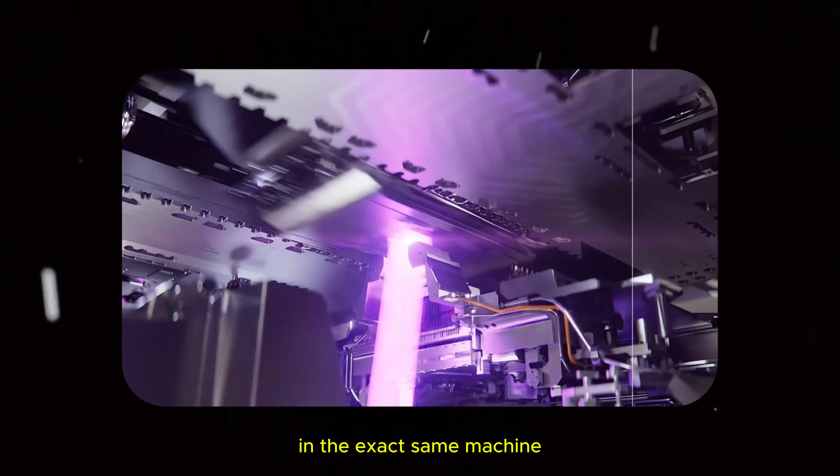50,000 times every single second, a laser detonates a droplet of molten tin, smaller than a grain of pollen. In the exact same machine, a separate mechanical stage slings a silicon wafer back and forth at 32 Gs, more than 3 times the force that makes a fighter pilot black out.

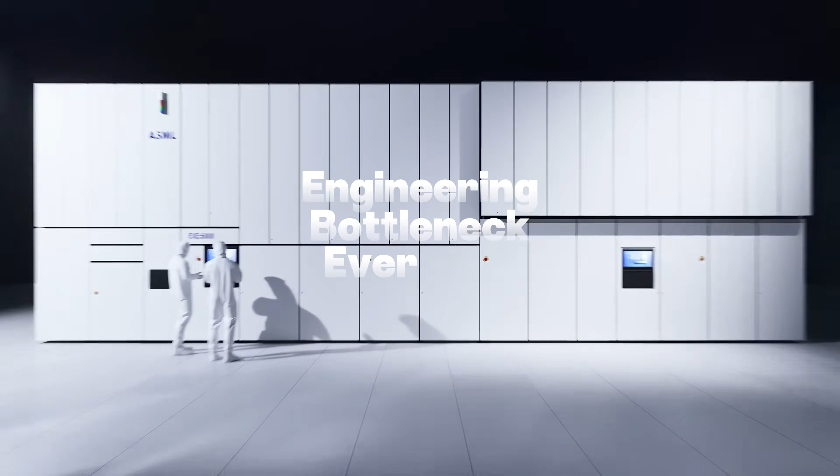It has to land within a fraction of a nanometer every single time. Which is exactly why the United States government stepped in and legally prohibited this machine from ever entering China. It is not classified as a weapon, it is a leash, and if this single engineering bottleneck ever fails, the global balance of power changes forever.

In February 2023, ASML quietly admitted something buried inside a routine annual report, the kind of document nobody reads except corporate lawyers and compliance officers. A former employee, based in China, had pulled out confidential data from a system called Teamcenter. This isn't just an app, it's the internal digital vault where ASML stores the highly classified technical guts of how its machines are actually built.

It wasn't a blueprint stolen off a desk. It was a repository login containing 2 million lines of source code from a related case ASML had already fought in court. The company called it not material. The Dutch government called it economic espionage.

We are going to come back to this login screen because it's not just a footnote, it is the entire point. A single company spent 40 years building a physical machine monopoly that literally no other company on earth can replicate it. And the most dangerous threat to that laboratory wasn't another lab or another research tech or anything. It was a login and a password.

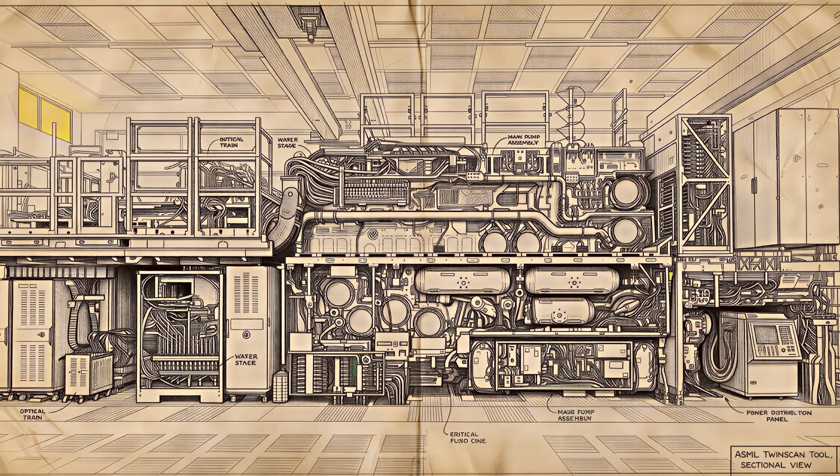To understand why that login is treated as NASA-level security itself, we have to look inside the vault itself. What was it inside that made the login and password so critical? Once you see what this machine forces physics to do, you will understand why a single leaked credential is treated like a declaration of war.

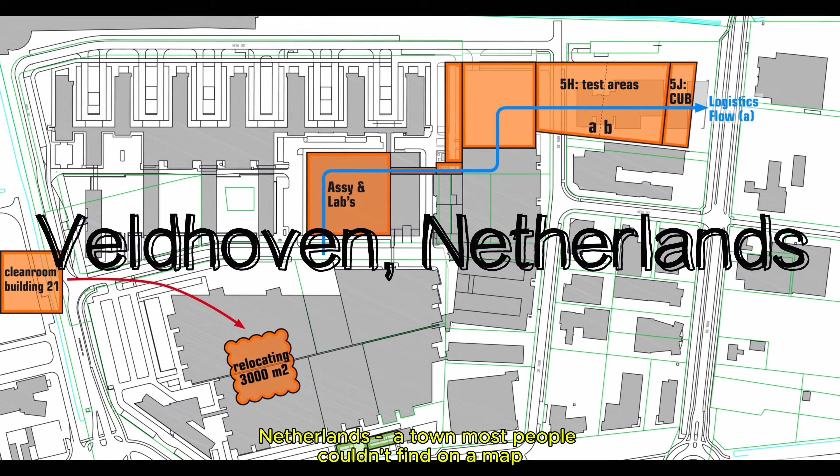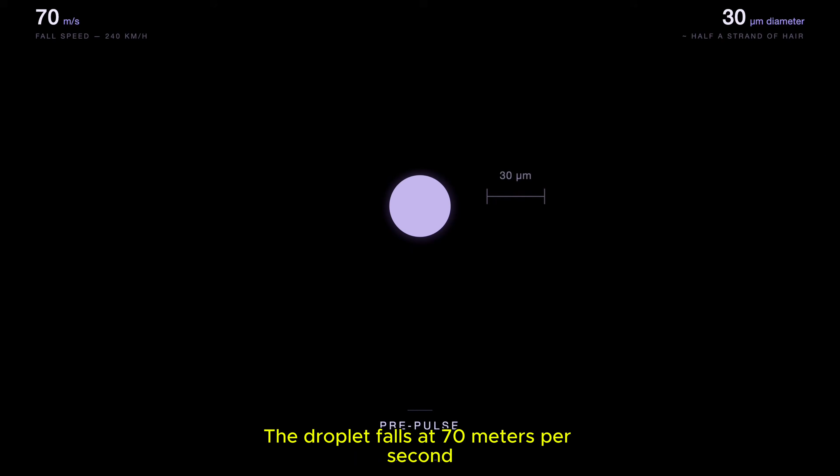A nozzle inside a sealed vacuum chamber, located in a quiet industrial park in Veldhoven, Netherlands, a town most people couldn't find on a map. It fires a continuous stream of molten tin. Each individual droplet is exactly 30 microns wide. For scale, that is roughly a quarter of the width of a single human hair. You could fit 4 of these droplets side by side, like on the same strand of hair, and still have some room left over. The droplet falls at 70 meters per second, 240 kilometers an hour. That is faster than a Formula 1 car at full throttle.

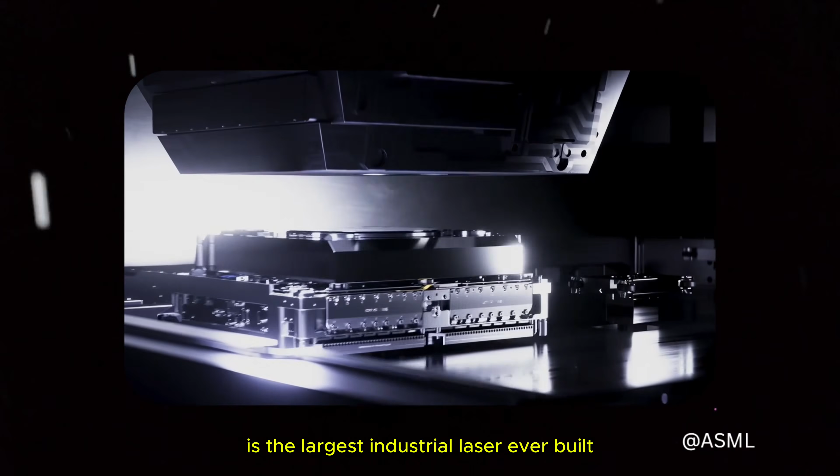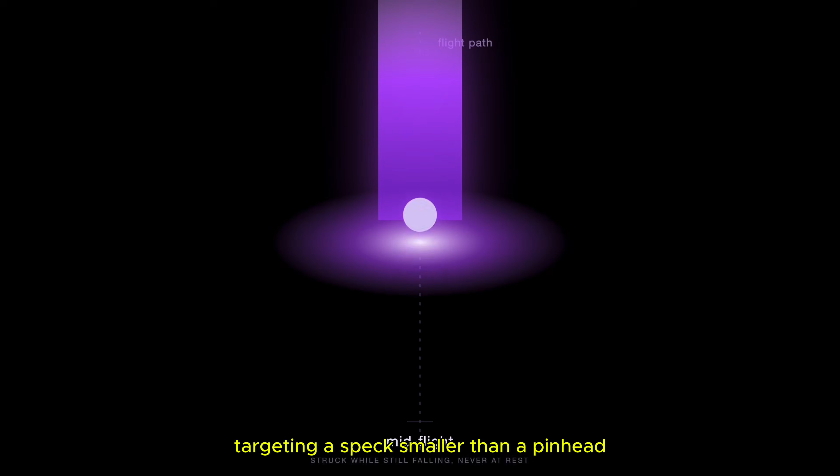Waiting for it in the dark is the largest industrial laser ever built for a single purpose. It doesn't just fire once, it strikes twice, in sequence, mid-flight, targeting a speck smaller than a pinhead moving at highway speeds. The first pulse is almost gentle, like a pre-pulse. Its only job is to flatten the falling sphere into a paper-thin disc, like punching a water balloon just hard enough to flatten it without bursting it. The timing must be down to the microsecond because this flattened disc is about to become the real target.

Then, a fraction of a microsecond later, the second pulse hits at full power. The tin doesn't melt, it vanishes into plasma, 240,000 degrees Celsius. That is 40 times hotter than the surface of the sun. A literal star, recreated for literally a microsecond that you wouldn't even notice, and you could walk past it even in a parking lot.

When that former employee breached the Teamcenter vault, they weren't just looking at schematics. They were looking at the code required to govern this exact sequence: droplet, pre-pulse, kill shot, plasma, 50,000 times every single second, running continuously in Taiwan, South Korea, and Arizona right now. Nobody designed this process to be safe. They designed it to be barely survivable for the machine itself, so the machine could even break at any point. Because what that plasma explosion unleashes next is an engineering disaster ASML still hasn't fully solved.

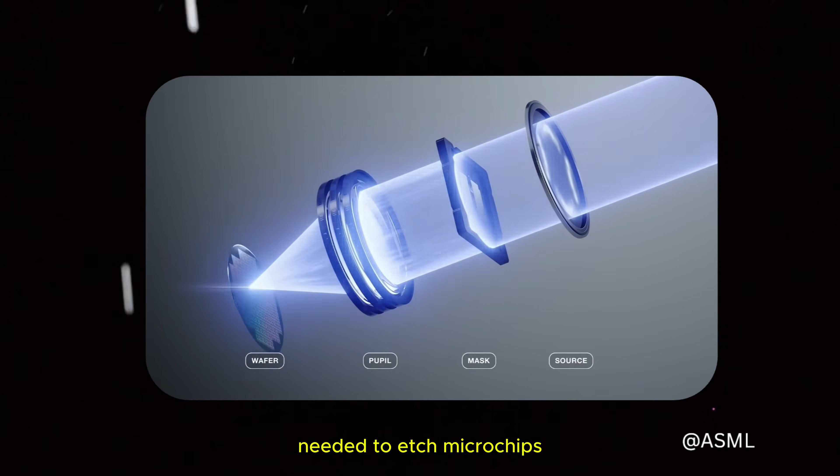That plasma blast doesn't just generate the extreme ultraviolet light needed to etch microchips, it creates shrapnel. Every single detonation throws high-energy tin ions and molten debris straight into the only surface forced to take the hit: the collector mirror, 50,000 times per second. This multi-million-dollar optical surface is sandblasted by material hot enough to vaporize steel. By any normal engineering logic, this should not even last a single operational shift. But here's why it does.

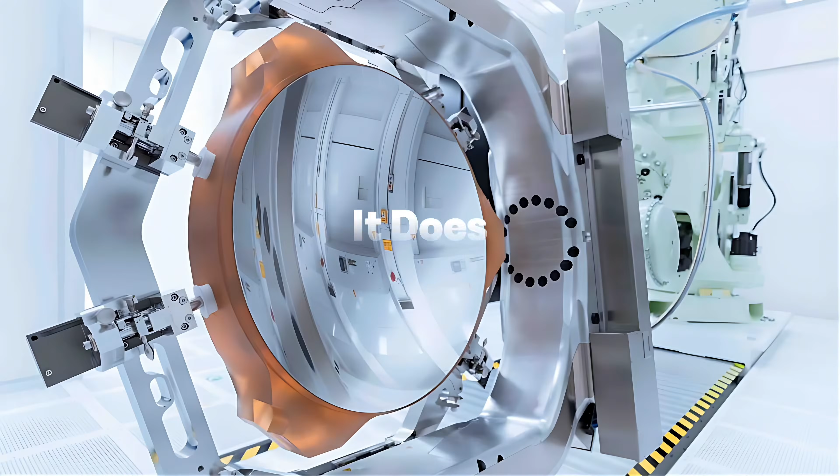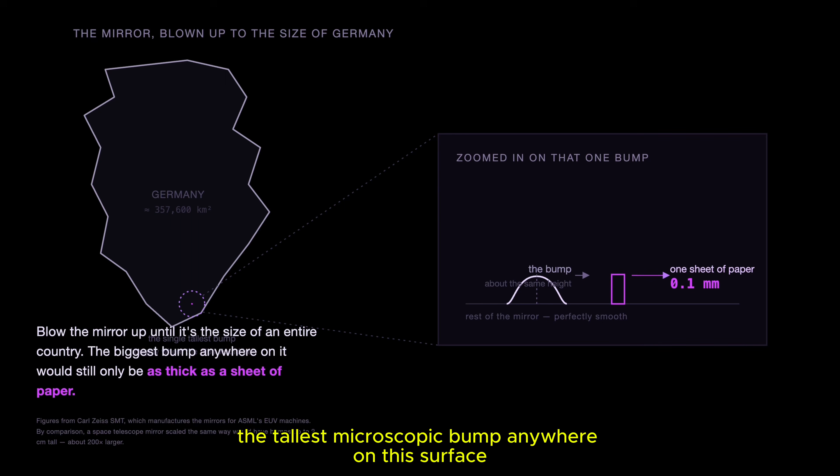This mirror, built by Carl Zeiss SMT in Germany, is the most precisely manufactured surface human beings have ever engineered. If you scale this single mirror up to the physical size of the entire country of Germany, the tallest microscopic bump anywhere on this surface would be a mere 1/10 of a millimeter, thinner than a single sheet of paper.

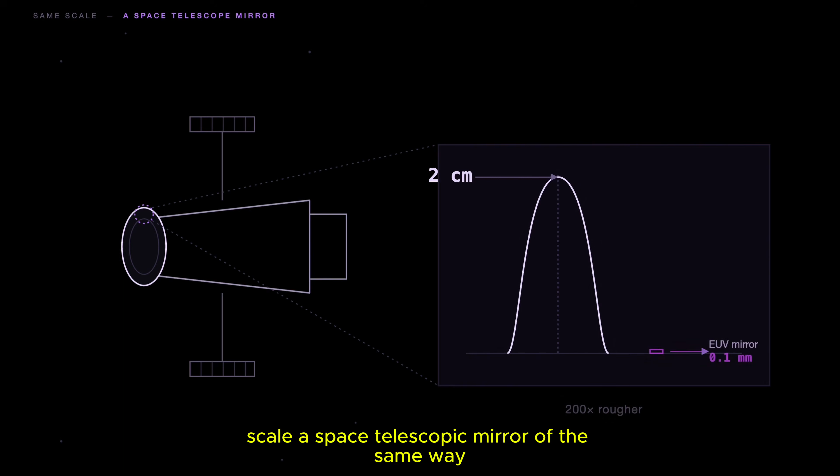Scale a space telescopic mirror up the same way, and its imperfections would stand 2 centimeters tall. This collector is 200 times flatter than the glass we use to photograph deep space galaxies. 200 times, and yet the atomic violence still wins.

A contamination layer, even if it's just 1 nanometer thick, a film thinner than the wall of a soap bubble, slashes the mirror's optical performance by 20%. It takes exactly 60 seconds for that degradation to happen. Think about that. A masterpiece of atomic scale polishing ruined by dirt you cannot even see, in the time it takes for you to watch this section of the video.

So how do you keep a mirror from dying every 60 seconds? How do you protect it? ASML's solution is absurdly bold: they flood the entire vacuum chamber with hydrogen gas. The hydrogen chemically reacts with the rogue contamination, scrubbing it off the mirror automatically while the machine continues to fire. It sounds simple, or maybe it doesn't, but it works perfectly, and it has been working perfectly for years. That's how they have been able to keep the machine from destroying itself. If that wasn't the case, it would die every minute. This machine is just insanely vulnerable to that kind of thing.

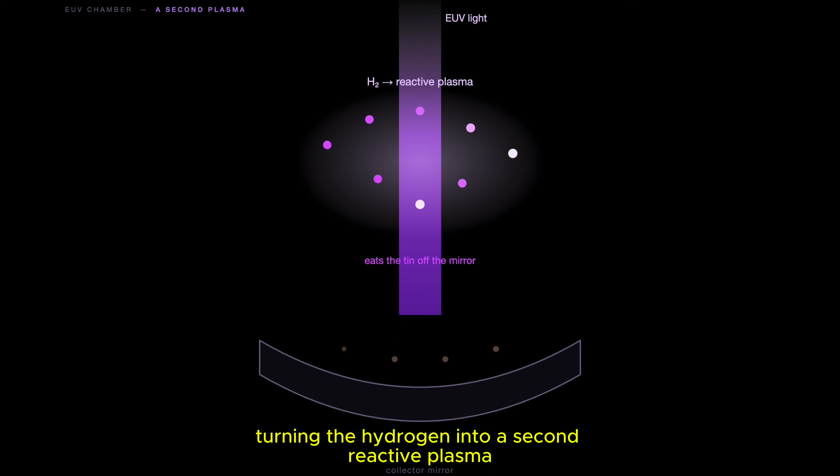But there is a catch. That same hydrogen gas is blasted by the ultra-powered EUV light it's meant to protect. The light ionizes the gas, turning the hydrogen into a second reactive plasma, one that can blister the mirror coating from underneath and introduce something every engineer inside that facility is trained to fear: the permanent standing risk of a hydrogen explosion inside a sealed chamber.

And all that plasma chaos we just walked through is just the top layer of it. The bottom half of the machine actually has to use that light now. Underneath the optical path rests the mechanical stage holding the silicon wafer, waiting for its exposure. In ASML's newest high-NA systems, this stage doesn't glide, it violently slams. It accelerates and decelerates from 0 to 100 km/h in a tenth of a second inside a hard vacuum, pulling 32 Gs of force. Fighter pilots train for years to survive 9 Gs before blacking out.

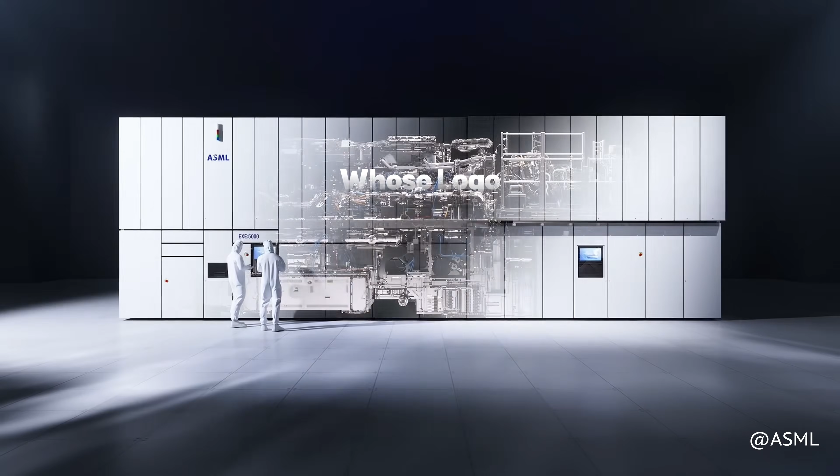Here's the part that nobody mostly tells you about this: ASML doesn't really build most of this. They don't have the bigger hand here. The company, whose logo is stamped on the outside of this 180-ton chassis, manufactures somewhere between 10 to 20% of the components inside. The other 80 to 90% comes from the outside. It is sourced from over 5,100 highly specialized suppliers scattered across a dozen international borders. And crucially, almost every single one of these companies is the only entity that can actually build their part themselves.

So this machine is complicated, to say the least, and ASML is not a traditional manufacturer. This is exactly the physical integration point where all of these companies have to be friends, or shake hands together. Which means the real geopolitical question was never how does ASML build this thing? There is nothing - they can't really build this on their own. It's what happens when even one of those companies says, I don't want to deliver this, or I want to stop doing this. What happens to the global economy when even one of 5,100 suppliers stops doing this?

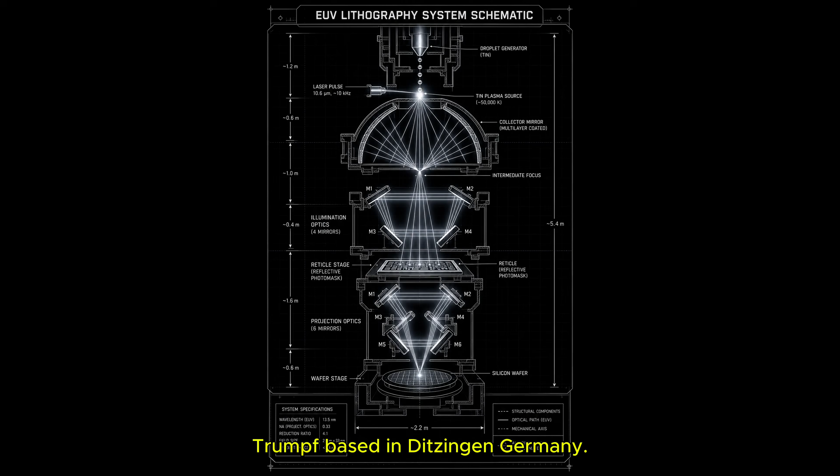We already met Carl Zeiss SMT in Germany the sole source for the ultra-precise mirrors. Now meet the second critical monopoly, Trumpf, based in Ditzingen, Germany. They built a 10-ton carbon dioxide laser used to detonate the tin droplets. This single laser module is made of 450,000 individual parts. For perspective, a commercial Boeing 737 passenger jet has roughly 360,000 parts. The laser system required to ignite a speck of tin smaller than a pollen grain has significantly more components than a commercial airliner.

And the third vital piece doesn't even come from Europe at all. It comes from Cymer, located in San Diego, California - an American firm that ASML was forced to buy for $2.5 billion because absolutely no one else on Earth was able to figure out how to perfectly synchronize 50,000 droplet explosions a second with commercial manufacturing consistency. Three proprietary technologies, three distinct nations - none of them can actually build the machine by themselves.

And yet everyone has to be on the perfection side of things. They have to hit every single thing with perfection in order for this machine to even run. If not, the whole company in Veldhoven freezes. There's really no point to that 180-ton chassis if even one of the parts isn't running.

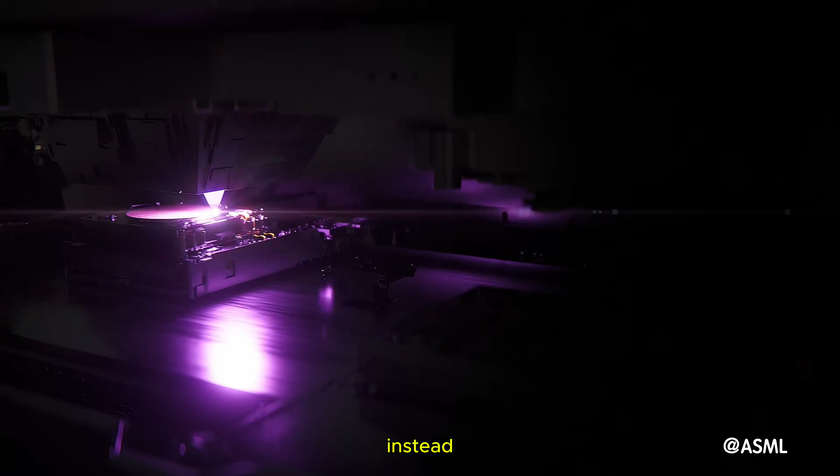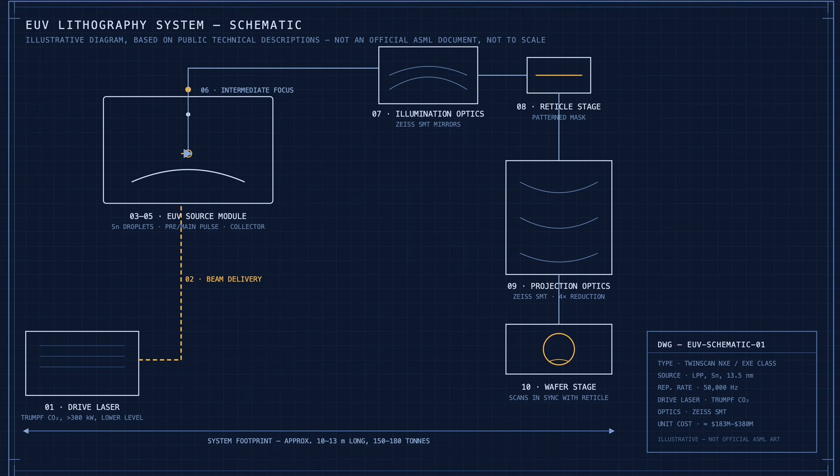But there is one thing - one hidden choke point that should make you worry far more than any hardware system does. Because it isn't mechanical, it's chemical, and outside the semiconductor industry, nobody really talks about it. The extreme ultraviolet light does not carve the silicon directly. Instead, the wafer must first be coated in a highly specialized light-sensitive liquid chemical called photoresist. When the light strikes this film, it alters its chemical solubility, allowing the foundry to etch the circuit lines. Without this specific chemistry, the most expensive machine on Earth is entirely useless.

It becomes nothing more than a $350 million flashlight. That is an expensive flashlight if you ask me. At the leading edge of physics, for the exact chemical formula qualified to handle EUV wavelengths, there are effectively only 3 companies left on Earth: Tokyo Ohka Kogyo, JSR, and Shin-Etsu Chemical. All 3 are Japanese, and together they control over 90% of the total EUV resist market. 90%. Three companies and one island nation.

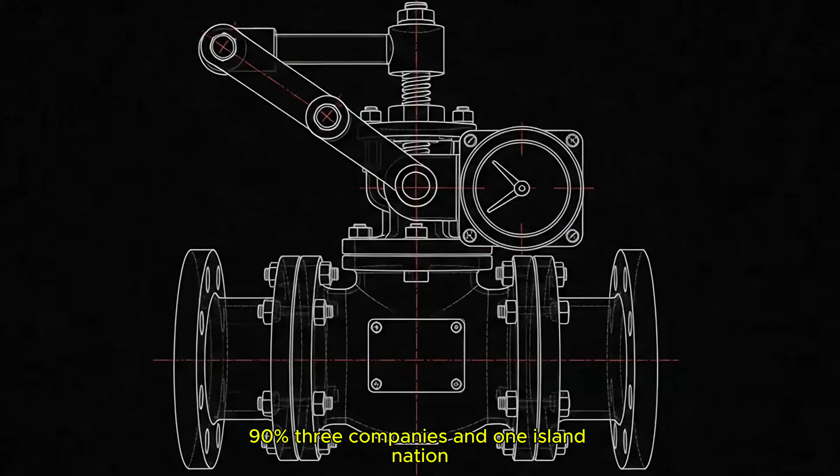And unlike a mechanical valve, you cannot just swap chemical vendors if a supply line experiences a hiccup. Qualifying a brand new photoresist at an advanced fab requires upwards of 12 months of grueling, highly collaborative engineering to get the chemistry, the scanner, and the atomic node to align perfectly. It isn't just a simple purchase order, like whoever places the order gets it right and done. It's not as simple as that, let me just put that outright. And whoever controls those 3 chemical plants holds a countdown timer that a rival nation cannot fast forward, no matter how many billions you throw at it.

This isn't a hypothetical economic theory. This exact weapon has already been fired once and hit a country nobody expected. In July 2019, during a bitter diplomatic dispute, Japan suddenly restricted the export of advanced photoresist and two other foundational chip-making chemicals to South Korea.

Not China, South Korea, the home of Samsung and literal backbone of the global tech economy. For months, the most vital electronic supply chain on Earth watched its production inventory tick down to single digits because a chemical shipment was held at a customs dock. Imagine elite engineers watching their remaining chemical inventory dry up day by day, knowing it takes nearly a year to qualify an alternative formula. That isn't a standard supply chain delay. That is an economic hostage situation.

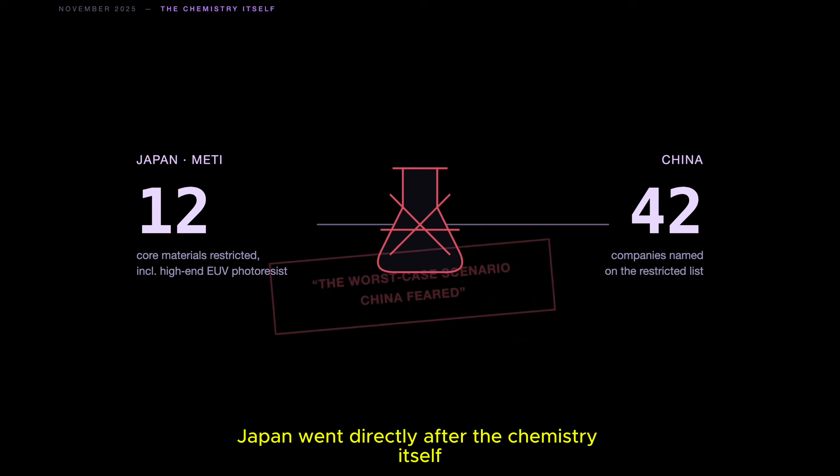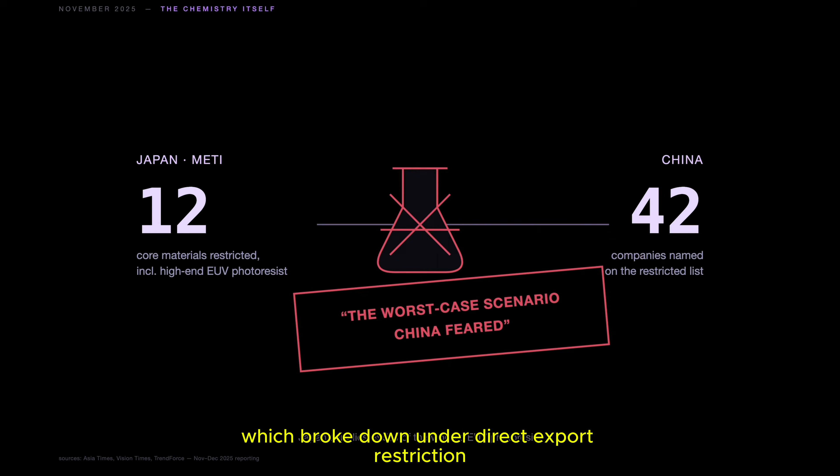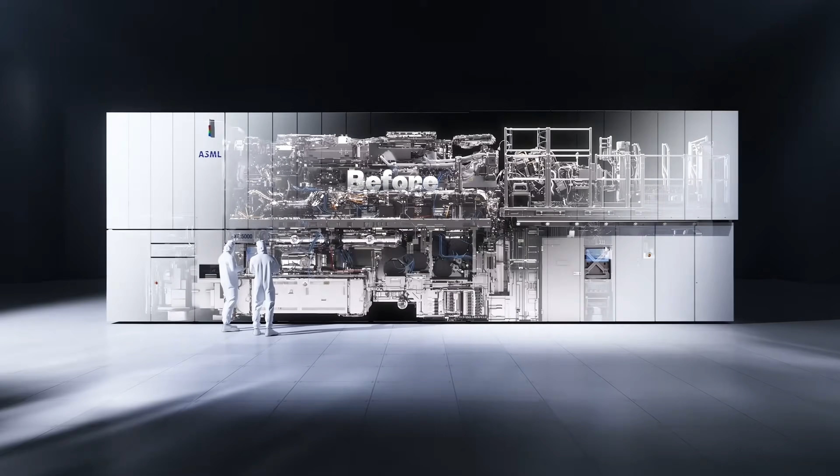In November 2025, Japan went directly after the chemistry itself, placing 12 core semiconductor materials, including the EUV photoresist, under direct export restriction, naming 42 specific Chinese companies outright. Within weeks, one of Japan's leading resist giants reported that its China-bound exports had collapsed by over 40% in a single month. The physical machine in the Netherlands didn't have to move an inch. There was no need. The entire infrastructure of the next tech war was choked off before the actual hardware could even leave the lab floor, which leaves every nation outside this exclusive trade alliance facing a brutal engineering dead end.

If the global supply chain is locked down, why can't you just reverse engineer the pieces yourself?

Here's the raw, uncomfortable truth behind this geopolitics. Even if a rival government disassembled an EUV machine down to its atomic particles, it would still be impossible to replicate this. We have to understand that. They could just replicate it, but it just wouldn't work. And not because the blueprint isn't classified or isn't truthful, but because you need those 40 years of tacit knowledge to make these atomic particles work.

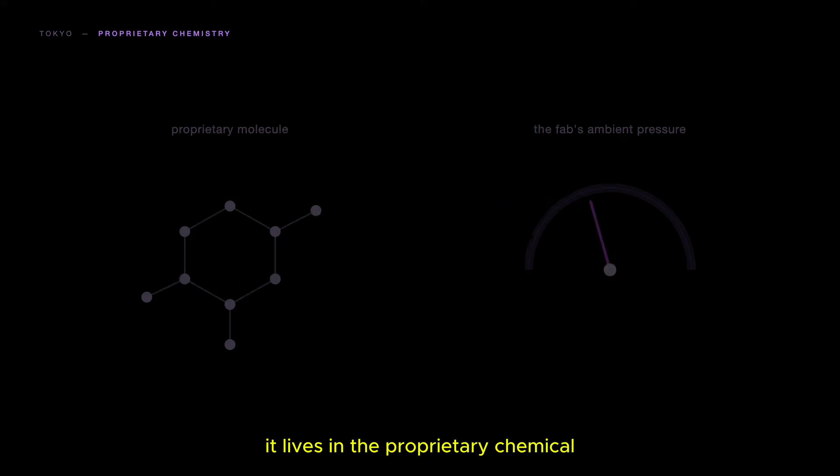This is a very complicated machine, and that data doesn't live inside a text file. It lives entirely in the muscle memory of an optical polisher in Germany who can feel a sub-nanometer flaw with their hands. It lives in the proprietary chemical recipes of chemists in Tokyo who tune molecules to match a specific fab's ambient room pressure. You cannot reverse engineer 40 years of institutional knowledge in a single generation.

But here's what should keep you up at night about this crazy global monopoly. This machine is built by 5,000 suppliers. A machine this hyper-distributed, with 5,000 suppliers, a dozen borders to cross, and zero redundancy for its most critical components, isn't just impossible to replicate. It is catastrophically fragile, very fragile. One raw material delay in Germany, one chemical batch that fails validation in Japan, or one export license that gathers dust on a desk in Veldhoven is all it takes to halt the technological progress of this entire world.

And that acute vulnerability is exactly why the battle lines were drawn. Because while the engineers were focused on solving the physics of lasers and plasma, the decision to weaponize this machine was made far away from any clean room. It was decided inside a secret briefing room in Washington, based on a single realization about a national 5G network rollout that hadn't even broken ground yet.

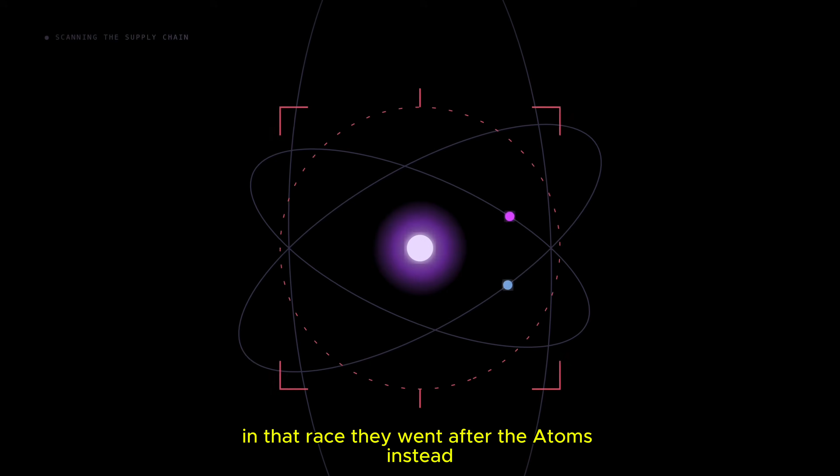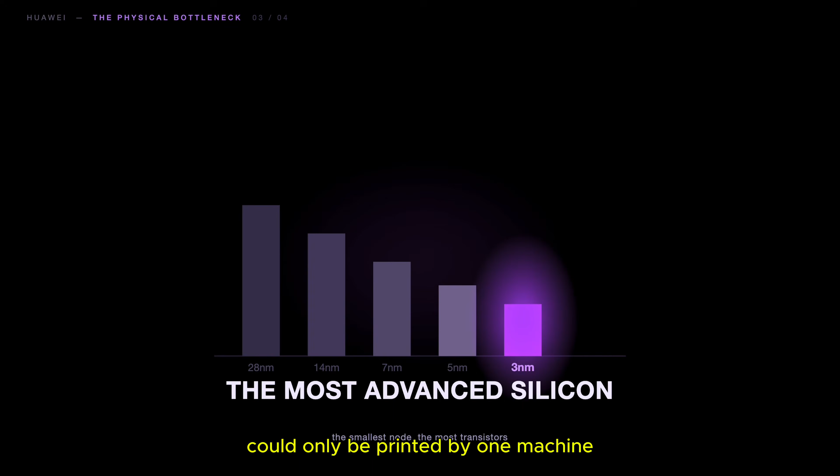They went after the atoms instead. Every line of code Huawei would ever write had to eventually be etched onto a physical piece of silicon, and the most advanced version of that silicon could only be printed by one machine, built in one town in the Netherlands. The United States didn't really need to build a better network. It needed to lock the gate from which the actual network was about to be built.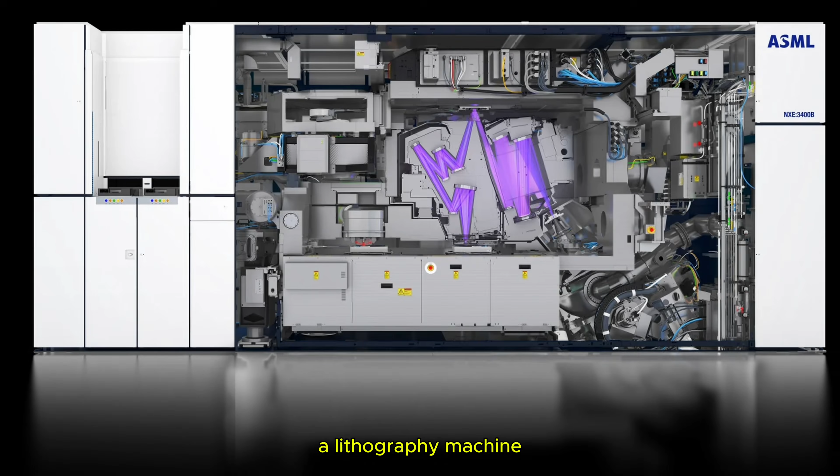The first move was purely bureaucratic. Washington pointed directly at the Wassenaar Agreement, a treaty signed by 42 nations to stop the proliferation of dangerous dual-use technologies. The logic was simple: a lithography machine capable of printing microchips for next-generation military hardware isn't a factory tool anymore, it is a strategic asset. But the Wassenaar Agreement is voluntary and has no real enforcement teeth.

While diplomats argued over legal definitions, a Chinese state-backed chip maker called SMIC had already placed a real order for a real EUV machine with a real shipping date. The treaty alone could never stop that vessel. Trust me, it couldn't. So the United States went around it, utilizing a much sharper tool available in their own legal arsenal.

In April 2018, SMIC placed its order with ASML for a single EUV machine, $150 million. Delivery was expected by the end of that year. It never arrived. And what happened next wasn't a public press conference or a diplomatic trade ban. It was something much colder. According to multiple Reuters reports, the US Secretary of State personally flew to the Netherlands and told

the Dutch Prime Minister directly that this specific shipment endangered common security interests. Over the following months, Washington held at least 4 separate private sessions with Dutch officials, pressing the exact same point. The Dutch government never rejected SMIC's export license outright. It just never approved it. The paperwork sat on a desk. It was always there. The renewal request stayed permanently under review.

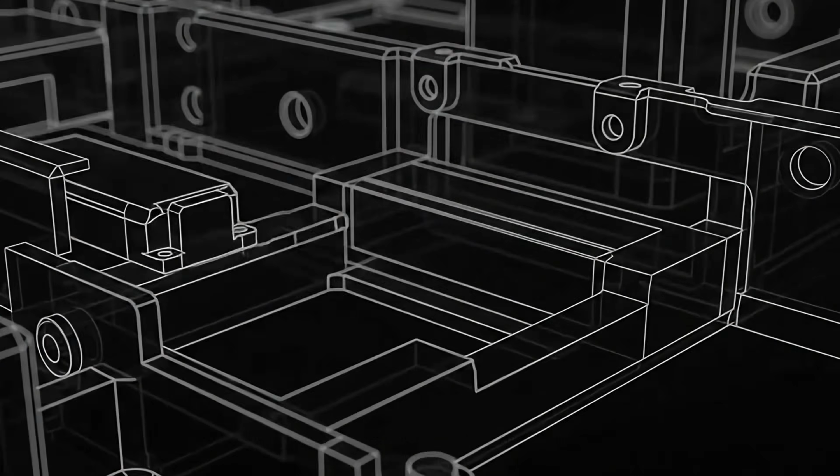The diplomatic pressure worked once, right? It worked once, but it relied entirely on the personal relationships that they had. It wasn't a permanent system, like 'oh yeah, from now on we're gonna do this.' It was just a personal thing at that time.

US trying to be the smart ones here. Over the next several years, Washington built one system: the Foreign Direct Product Rule. Think about the sheer audacity of this mechanism.

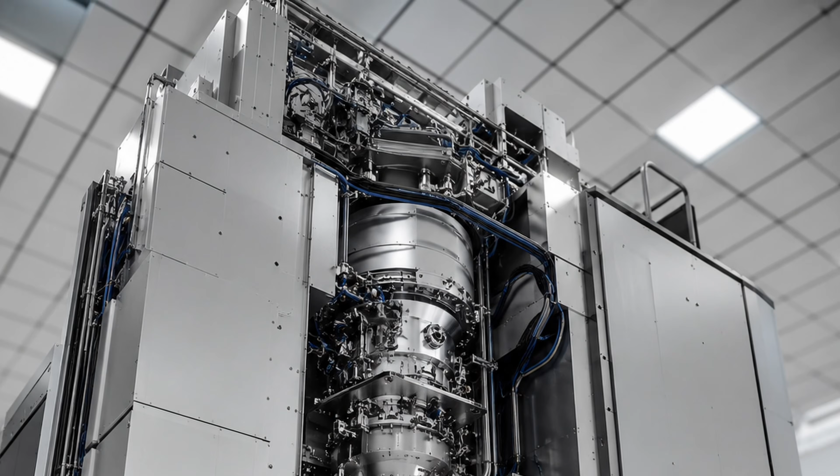What they were trying to do is: if a product is manufactured anywhere on earth, under any flag, in any country, and its creation relies on a defined threshold of American software, engineering or components, the United States claims total legal jurisdiction over where the product is allowed to go. Remember the ASML slideshow I talked about 2 chapters back? The critical module that detonates 50,000 tin droplets a second is built by Cymer in San Diego, California, American soil, an American company. Even though it's wholly owned by a Dutch firm, it remains American in the eyes of this rule.

In 2020, the United States used this exact mechanism to cut Huawei off from semiconductor chips made anywhere on earth using American tools, even chips manufactured entirely outside the US by foreign companies for a foreign customer. By 2022, that same architecture was expanded to cover entire categories of advanced computing and chip making hardware headed to Chinese borders.

The message to ASML and global tech supply chains was never subtle. Keep selling to restricted markets, and Washington can make your entire supply illegal or redundant overnight without ever setting foot in your factory.

Man, that is crazy work. I mean, I thought it was only about the oil in the US, man. Really, I thought it was only about the oils.

In October 2022, the blockade stopped being an abstract corporate issue and hit actual people. New US Department of Commerce rules barred American citizens and green card holders from supporting chip production at advanced fabs inside China without an explicit government license. ASML immediately issued an internal directive telling its entire US staff, citizens, permanent residents, and foreign nationals living in the States to cease servicing all Chinese customers immediately.

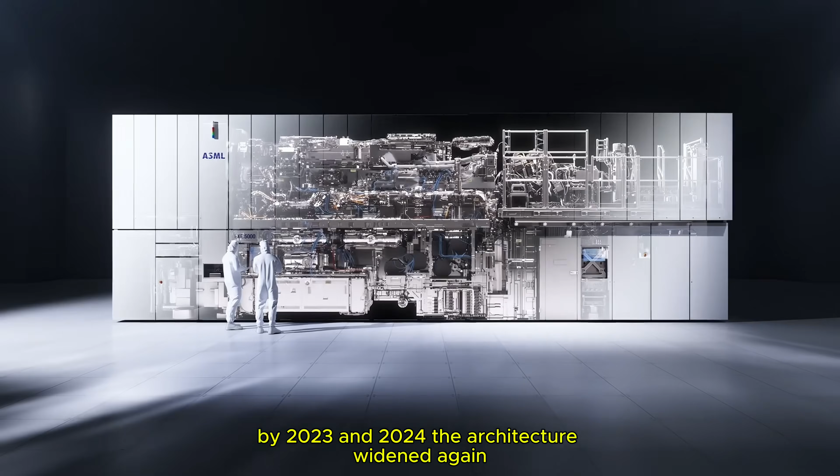By 2023 and 2024, the architecture widened again, restricting all the DUV machines and eventually cutting off maintenance, servicing, and software updates for equipment Chinese firms had already paid for and operated.

So, is the leash finally locked down? Here's the uncomfortable answer: nobody is fully sure, including the people enforcing it.

Just this month, in June 2026 alone, the US Commerce Secretary personally raised urgent concerns directly with ASML executives that an advanced lithography system or critical technology tied to it might have quietly slipped into China despite every restriction on the books. ASML was forced to issue an unusual public statement denying the claim, insisting that no EUV system and no EUV specific component has ever reached a Chinese customer. The Dutch government backed them up, stating its export controls are enforced with absolute strictness.

After nearly a decade of international treaties, licensing fights, citizen ultimatums, and a legal rule so aggressive it overrides foreign sovereignty, the world's most powerful government is still worried that something is getting slipped through, something is getting passed by. The actual blockade didn't make the leakage impossible. It just made everyone nervous enough to keep checking what else is going on, if there's doubt about what might have slipped through.

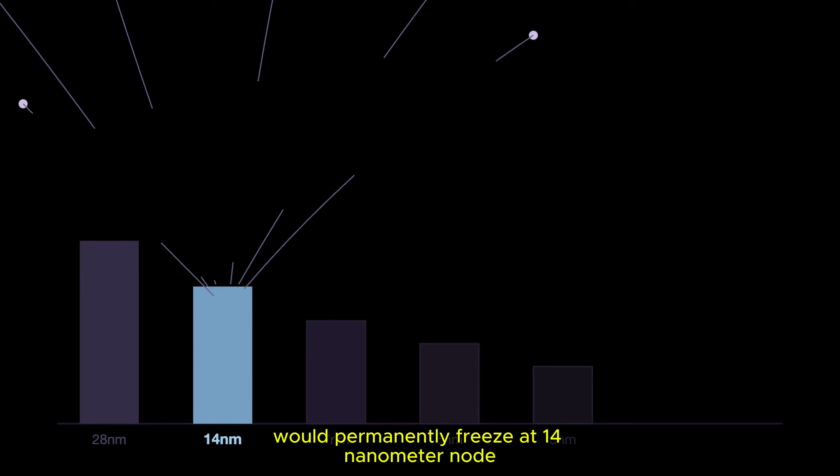When Washington locked the gate to Veldhoven, the global consensus among Western tech analysts was simple: China's domestic semiconductor capabilities would permanently freeze at the 14 nanometer node. That's what their analysis was. And like I said before, when you corner someone like that for so long, 7-8 years, they're not going to give up trying to get to the future. They will try to be one of the advanced countries on the planet.

And their analysis was simple: without ASML's EUV scanners, hitting the single nanometer node was practically impossible. You needed that machine to get to single digits of nanometers. Sometimes engineering is not just about elegance. Sometimes it is about sheer, brutal willpower.

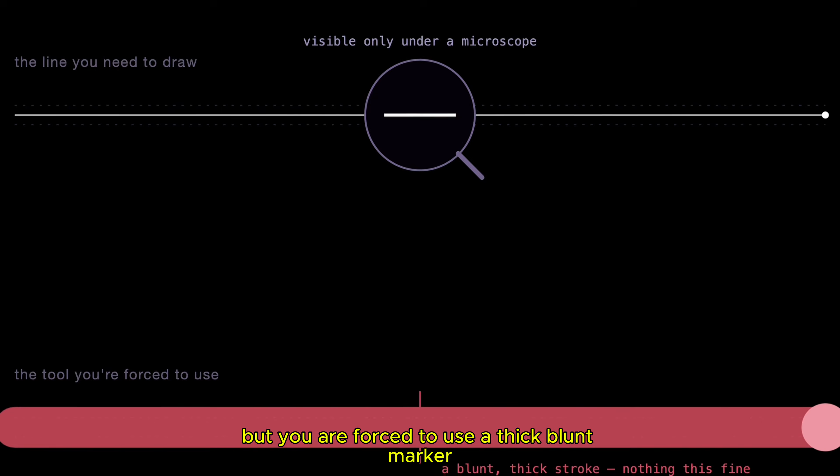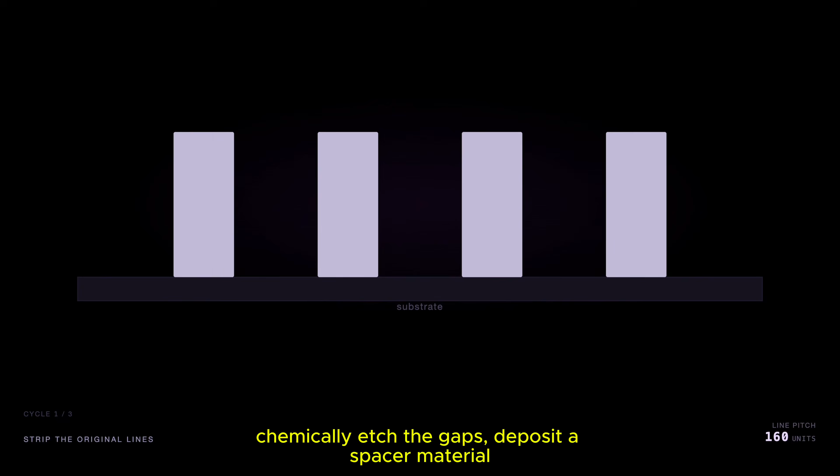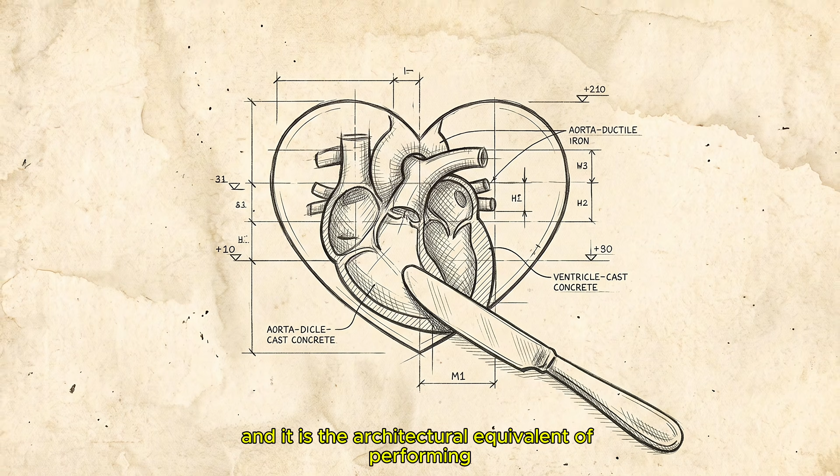Imagine trying to draw a line so thin it can only be seen under an electron microscope, but you're forced to use a thick, blunt marker. If you draw that line once, it's too wide. But what if you draw parallel lines, chemically etch the gaps, deposit a spacer material, and repeat that entire sequence 3 or 4 separate times just to shave down the distance between the tracks? This is called self-aligned quadruple patterning, and it is the architectural equivalent of performing open heart surgery with a butter knife.

Deprived of EUV light, Chinese state-backed foundries took their existing, unrestricted deep ultraviolet machines, tools designed for much older generations of hardware, and began running the silicon through them over and over again. It is an engineering nightmare. It destroys factory yields, meaning how many chips you try to get out, almost 70 to 80% is garbage. So that is pretty fucked up. The factory yield is just not there.

And with that, the production cost rises very high into the stratosphere. By any metric of capitalism, this is unsustainable. Literally can't do it because that is a large amount of wastage. But you have to understand, when a state is fighting this tech containment war, these kind of yields or traditional metrics of capitalism don't really apply. The state subsidizes the loss.

And in August 2023, the world woke up to a profound geopolitical shockwave: a brand new Huawei flagship smartphone running on a domestic 7nm processor. The blockade hadn't frozen the node, it had just forced the target to spend whatever it took to break through it. But there's another catch: quadruple patterning an older machine is just like putting a band-aid. It's not going to do much.

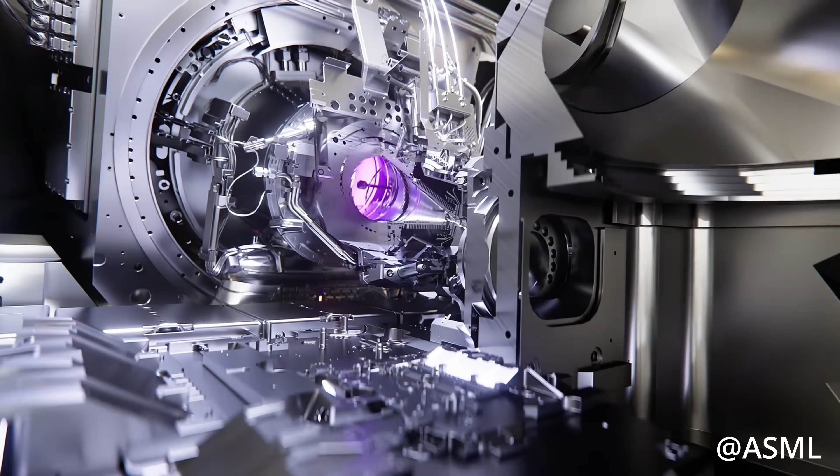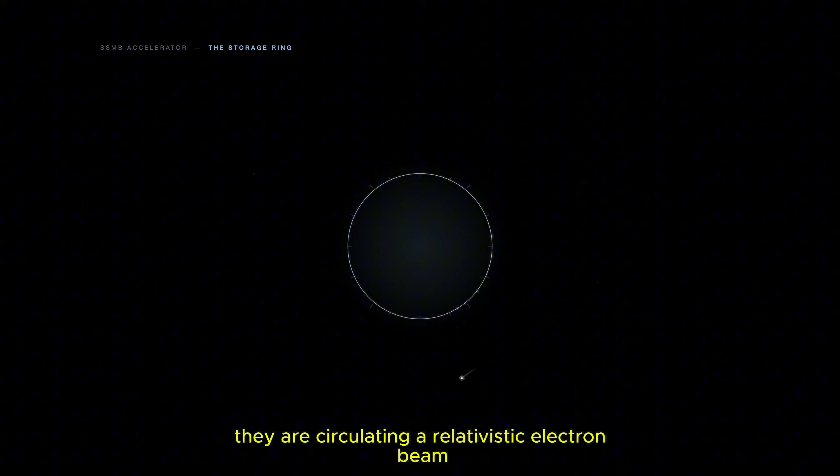You literally cannot use a blunt marker to get to that 2nm frontier. To get there, you absolutely need that impossible 13.5nm light. So if you cannot buy the machine, that 180-ton chassis, how do you actually get the light? You build a particle accelerator ring. Chinese research institutes have actively filed patents and broken ground on an entirely alternative approach to lithography. Instead of using a laser to detonate individual tin droplets into a mobile scanner, they are circulating a relativistic electron beam around a particle storage ring with a circumference of roughly 100 to 150 meters, about the size of 2 basketball courts laid end to end.

The concept is called steady-state microbunching. The theory: a continuous high-power stream of extreme ultraviolet light with multiple chip fabrication lines arranged around the accelerator ring like spokes on a wheel, all drinking from the same central source.

Don't miss this staggering state of the structural shift. While the West spent 40 years trying to build and perfect a machine that can be transportable, get into a clean room, that is kind of the pinnacle of the engineering of nanometer process. Their rival is testing whether you can replace it with a stationary shared power plant instead. Light made once in one place and distributed outward to dozens of production lines simultaneously.

It is wild. It's actually fucking wild. And as of right now, nobody, including the physicists building it, knows for certain it can hit the extreme stability of commercial chip demands. But it really proves that the Leash didn't really stop the pursuit of physics. It just forced it to decentralize.

Which brings us straight to right now. And it's pretty ironic, to be honest. The ultimate irony of this semiconductor blockade is that it achieved exactly the opposite of what it was supposed to be. China was supposed to be banned and stopped, but somehow they made them even stronger. I mean, yeah, it's China, but yeah, whatever.

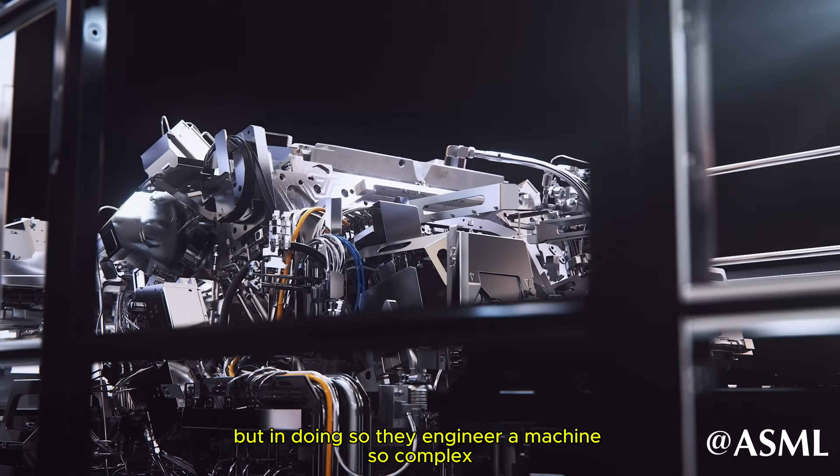ASML literally solved the physics to get the light to the real world. But in doing so, they engineered a machine so complex, so fragile, and so bottlenecked that it forced the entire empires of the earth to turn the science into a siege.

The battle lines of the next century aren't being drawn on any maps. Let me tell you that much. They are being etched, line by line, invisible into the silent, weaponized architecture of the sand.